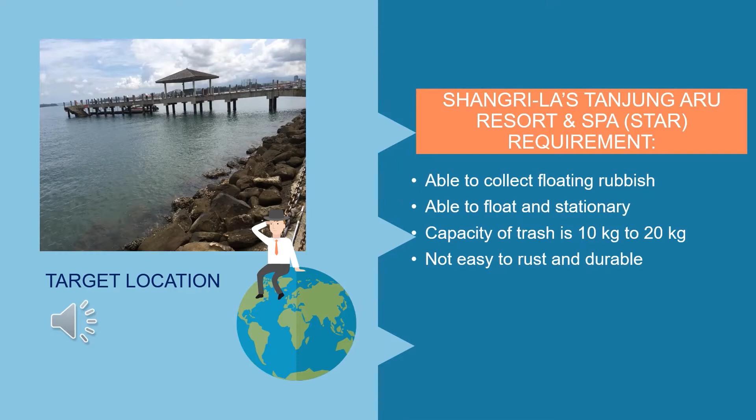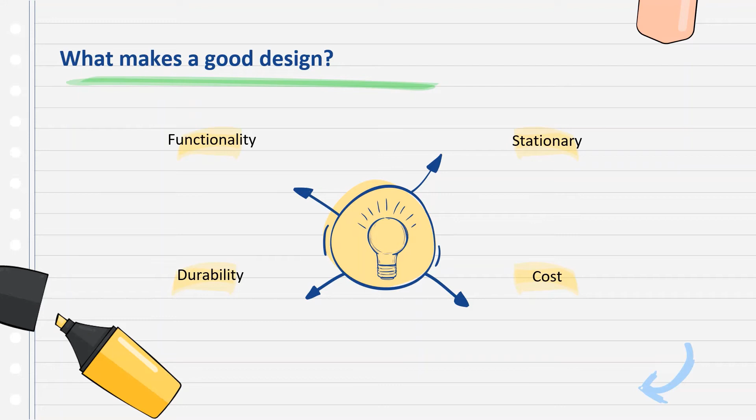Okay, now I will explain a few designs that were made before the final design was chosen. So what are the requirements needed before we proceed to choose the last design? Based on our objective, there are four requirements that make a good design: the functionality, the durability, the cost, and last but not least, the prototype design should be stationary.

So this is our first design. Our first sketch is a simple prototype consisting of bottles simply attached to a net. As you can see, we will use rope to assemble the bottles together, and the bottles are then attached to a net. The opening of the net is above the sea level, so the trash will get inside the net from the upper level.

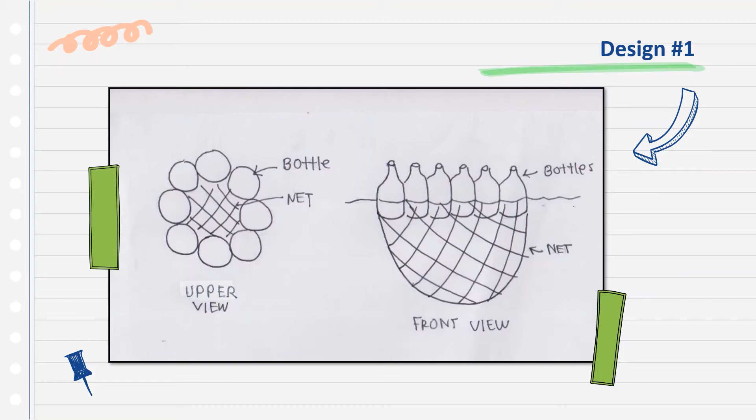The reason we propose this design is because it is not costly. The main item, the bottles, can be found in any recycling center. This is a huge advantage for us as we will not spend much money on the prototype. Unfortunately, there are many more disadvantages compared to the advantage. The first disadvantage is that the prototype is not functional.

The objective is to collect at least 10 kg of trash, and this design does not have a drive mechanism that encourages the trash to get inside the net. The net is designed to only collect floating objects. In addition, the opening of the net is above the sea level, so the collected trash might get stuck on the upper level of the net, and when it is full, the trash can get away easily since there is no lid to cover the opening of the net.

Secondly, the design itself is not stationary. The prototype only consists of bottles and a net. So even if we try to attach an anchor there, the prototype will not be able to float properly. The lack of an anchor will let the machine drift away.

Last but not least, it is not durable at all. As you can see, the bottles are only tied to each other using rope, so the chance of the rope getting untied is higher. This will then cause the bottles to disassemble and ruin the shape of the machine. It is a huge disadvantage for us, so we rejected the first choice and came up with more sketches.

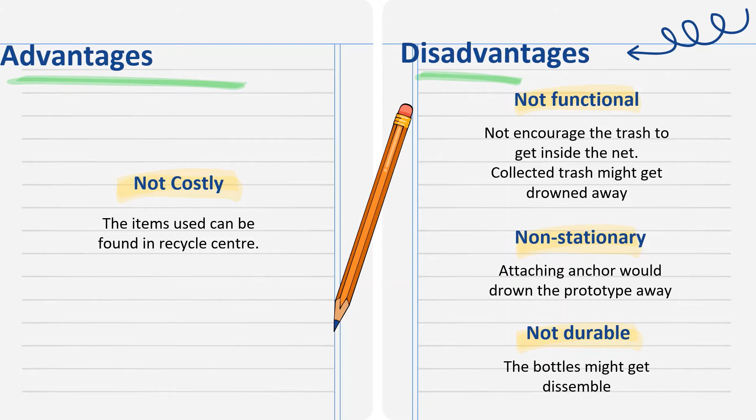Up next, we have our second design. This is built based on the concept of a vacuum, where there will be a suction, the fan, and the net as the tank. The body of this prototype uses PVC and the net is attached to the body. The net used here should be similar to a crab catcher net, as it will provide the shape for the net so it can attach easily to the PVC.

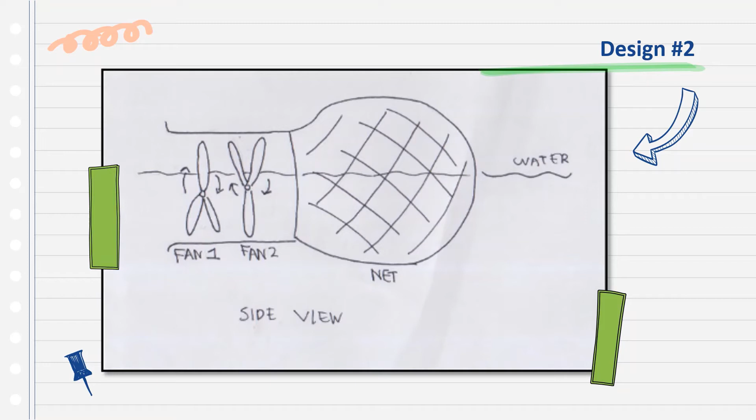The only reason why we came up with this idea is due to the durability. PVC is known as not easy to rot and will not get rust. It is also highly resistant to weathering, especially as we don't want our client to experience an ugly boat floating near the resort. But there are many questions for this design.

We just could not find any specific fan that can run by battery, especially when the fan is half floated. We also acknowledge that the fan would not function properly as we need a bigger power to force the trash to get inside the net, especially to cope with the natural force of the water. The size of the fan itself is a major problem. Some trash will not be able to pass through the small space within each blade.

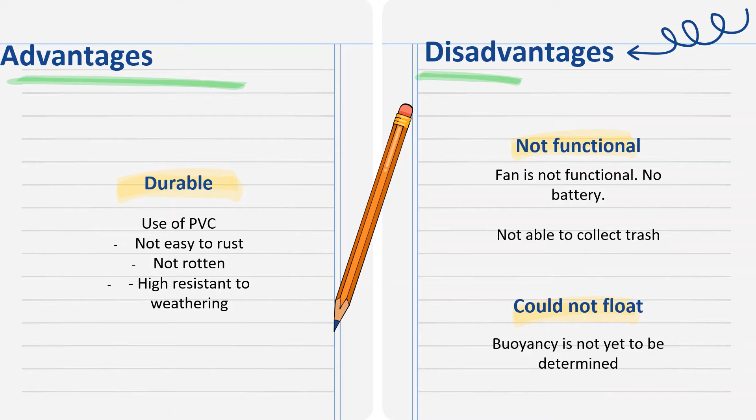The buoyancy of the prototype is yet to be determined, and we solve this problem in design number 3, which is the final design for the project. So this is our sketch for the final design. This design is inspired from our second design. So we try to improve the previous design by solving problems and adding extra features to the design. As you can see, the design consists of two parts, the head and the body.

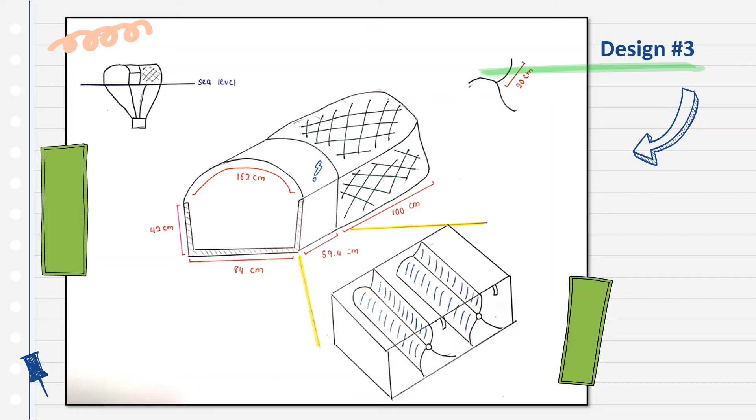The reason why we picked this is because we want the machine to stay stationary. We added brick as the anchor to support our prototype. This way, the machine will not be drawn away by heavy current. We also decided to use PVC as the main component for the project. There are many benefits from this material. Since it is lighter in weight and durable, it makes the design a good model for the prototype.

PVC, on the other hand, is not easy to rust and also highly resistant to chemical weathering. This then will make the prototype have a longer life, especially being thrown in the sea for weeks. The cost for this design is not costly. Polystyrene can be collected at any recycling center. The PVC is not expensive too. This is a great change for us.

The addition of polystyrene to fill the void between the walls of PVC will also provide buoyancy force for the prototype. The materials used are also eco-friendly, which is also a bonus for us to sustain the eco-friendly environment for the resort. Last but not least, the main reason why we picked this design is due to the functionality. To collect at least 10 kg of trash can be achieved as the blades are huge and are driven by nature force, allowing the trash to get inside the big net that will then trap it.

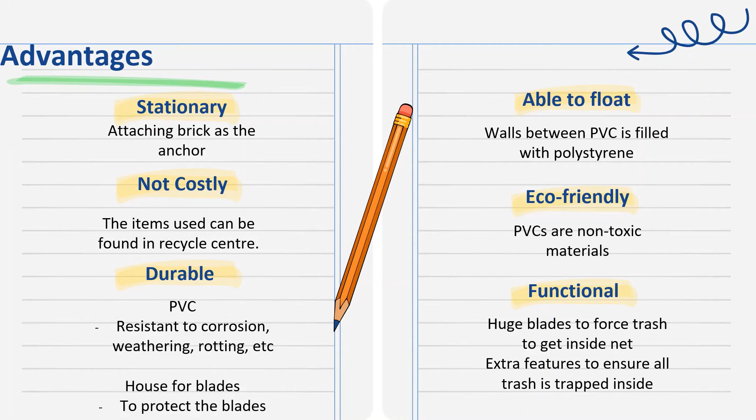To avoid the trash from being stuck within the blade, we also use a lock mechanism to ensure the blades are moving in sync with each other. The nets are also in good position as the probability for the trash to get away is little due to the presence of the blade which will pull the trash inside the net again. This is what makes our third design the best model for the project.

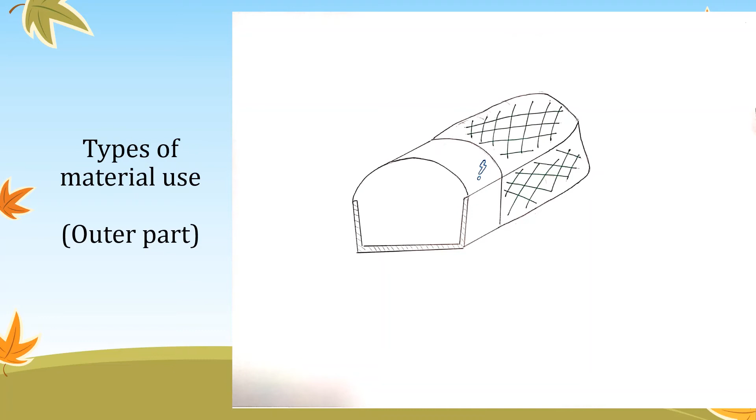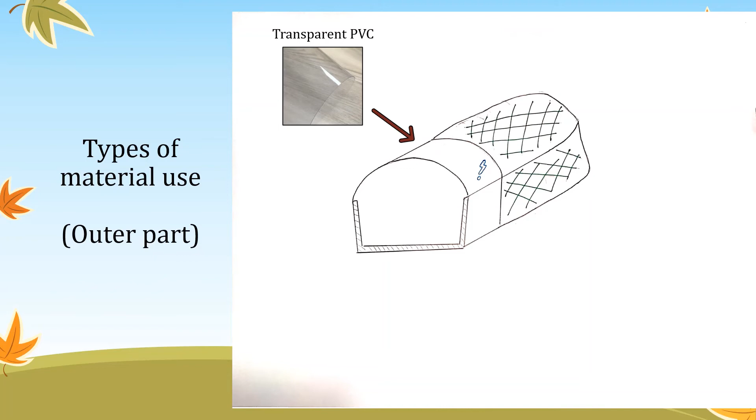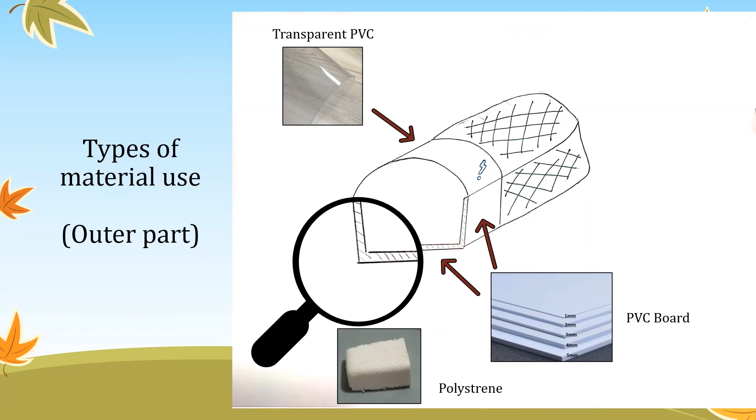Next, we will move on to the next part, which is the dimension of design presented by Nur Farah Ain Fitri binti Burhanuddin. The first one is the types of material used for the outer part. For the top part, we use transparent PVC that can easily be bent. For the side and bottom part, we use a PVC board. After zooming to the corner of the side and bottom, we will leave it with empty space, and this empty space we will fill with polystyrene. And lastly, at the back part of our design, we will put a fishing trap.

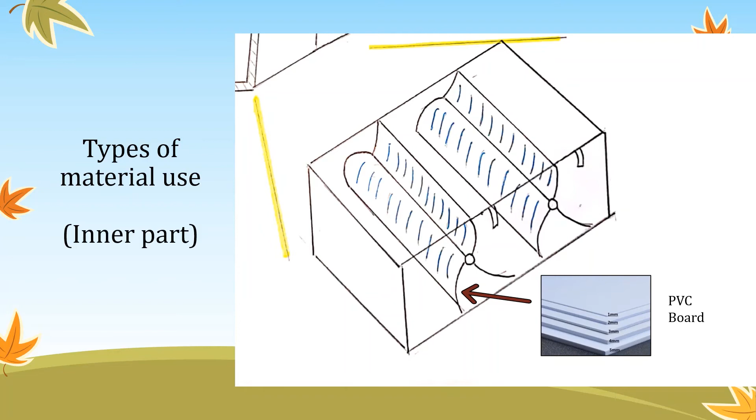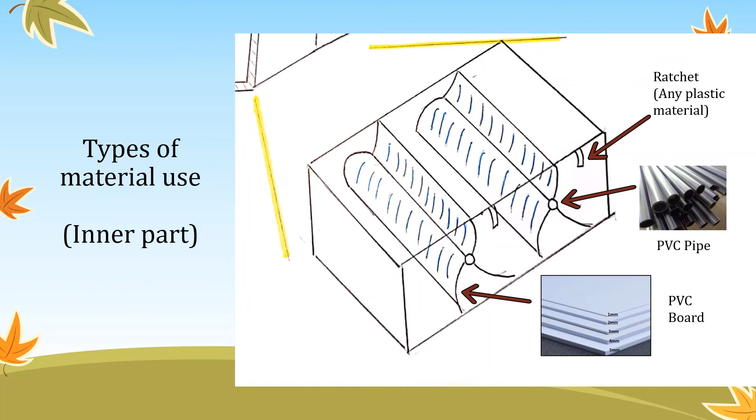In the inner part of our design, we put two turbines. Each turbine's blade is made of stretchable PVC board. As the support of our blade, we will put a PVC pipe at the middle. And last one, we will put a ratchet that is made of any tiny plastic material. Next, we move on to the measurement of the design. At the top part of our design, the top curve is

162 centimeters. For the sides of our design, we use the A2 size, which is 42 cm times 59.4 cm. For the bottom and base of our design, we used the A1 size, which is 84 cm times 59.4 cm. And at the back of our design, we use a 1 meter fishing trap. For the inner part, our blade would be 80 cm length and 20 cm the curve of the width.

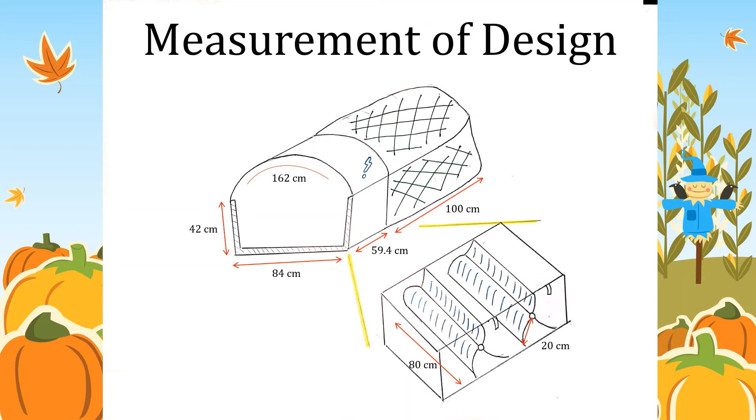Hello, I'm Nurifa and I'll be presenting the characteristics of the design.

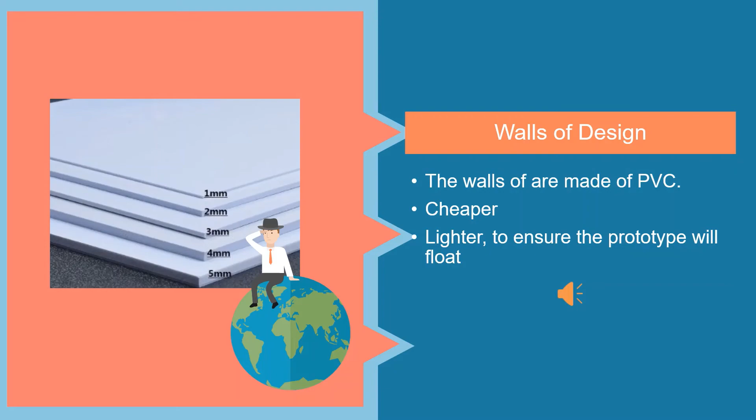The first characteristic is the walls of the design. The walls are made of PVC because it is cheaper and it is lighter, to ensure the prototype will float. Next is the shape for the top design. We chose a semicircle because it has a higher center of gravity, which is perfect for our design. And the semicircle is also made of flexible PVC, which is cheaper and much lighter.

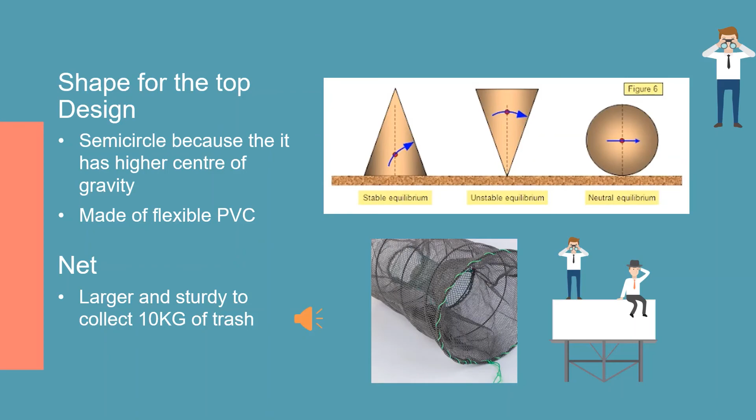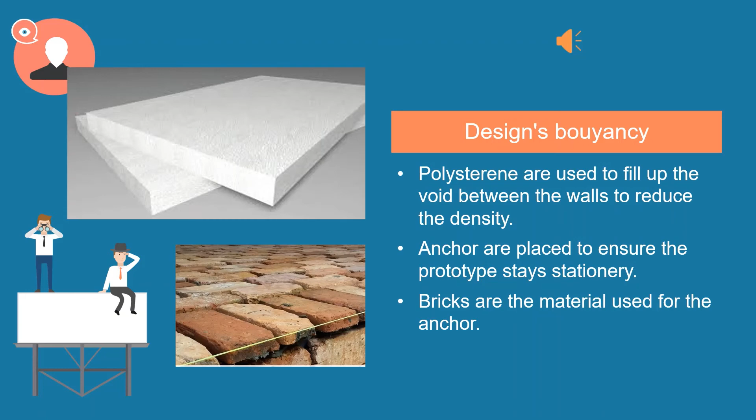The next part is the net. We chose a larger and sturdy net in order to collect 10 kg of trash. After that is the design's buoyancy. Polystyrene is used to fill up the void between the walls to reduce the density. Anchors are placed to ensure the prototype stays stationary. The material we use for the anchors is bricks because they are easier to find.

Besides that, we use a ratchet to ensure the blade only flows in one way. Last but not least is the size of the blade. We use a larger blade because it can lift up larger and heavier trash into the net. The blade is also made of PVC to reduce the cost.

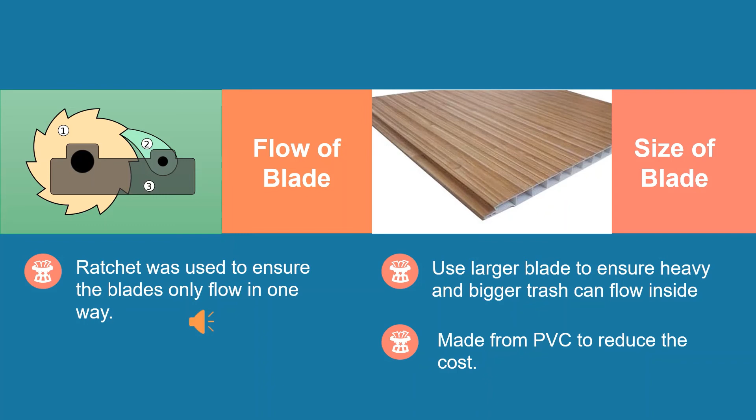This product works with the help of the water wave that moves the blade to push rubbish into the net. So firstly, when there is rubbish near this rubbish collector, the water wave will push the rubbish into the body of this prototype. Nearby rubbish will be sucked up into the prototype. Second, with the help of the water wave, the blade will rotate and push it further into the net.

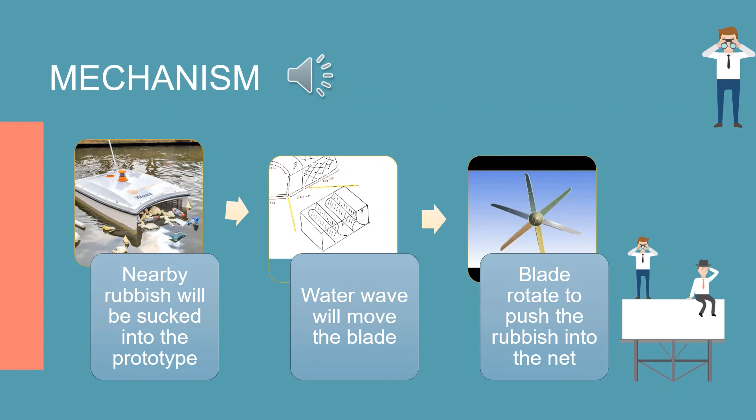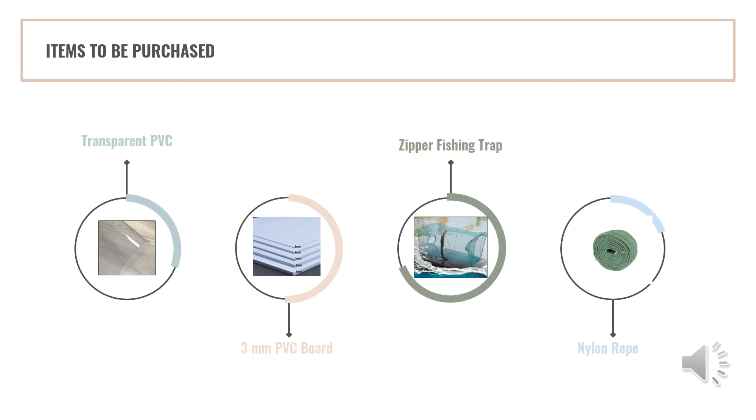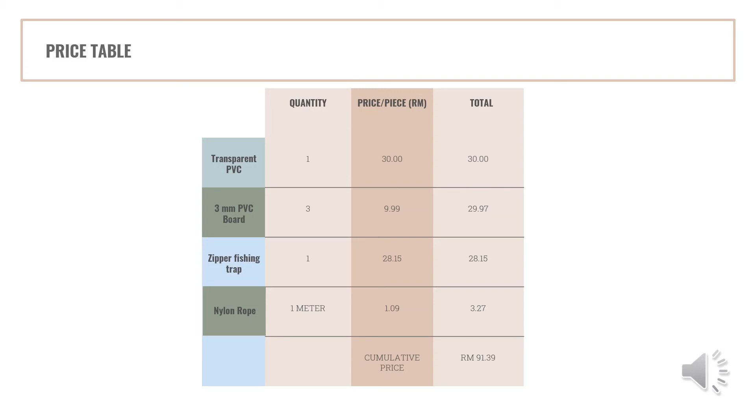Even if there are charges or expenses to buy these recycled items or any other minor items, it will not bother our budget, which is a maximum of 500 ringgit. Hence, this project design will not exceed our provided budget of RM 500.

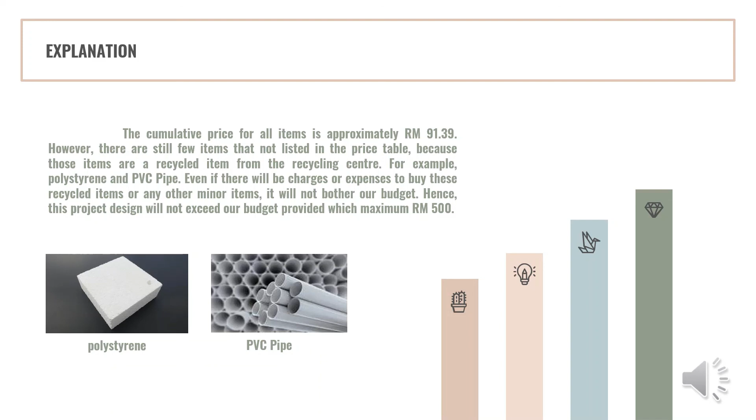As a conclusion, as required by the customer, this product can fulfill all the functional requirements. For example, this product is able to collect rubbish, and it is also able to float and stay stationary. The capacity of rubbish is in the range of 10 kg to 20 kg as required by our customer, and the material used does not rust easily and is durable.

The probability of this product being chosen by our customer is high. This is because it not only fulfills all the functional requirements, but it also needs a low budget to produce, and it is not over the budget limit that has been set by Star, which is 500 ringgit.

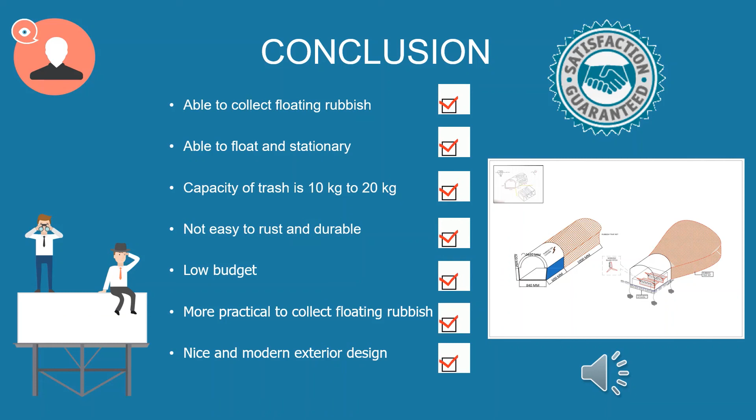And this product is more practical to collect floating rubbish instead of cleaning the beach once a week using human energy. Furthermore, the exterior design of this product does not ruin the image of Star as a tourism site due to its nice and modern design. All in all, this design fulfills all the needs and wants of the customer.